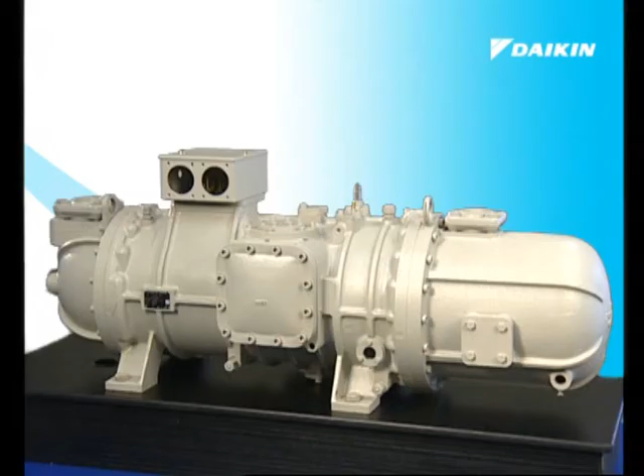A marvelous new feature has been added to the Daikin single-screw compressor: a capacity control mechanism that steplessly varies capacity between 30 and 100%. The major benefits are again simplicity and reliability. Before elaborating on this, let us first examine the main parts of the compressor.

To the far left side, the compressor inlet. Moving to the right, the electrical motor, then the compressor itself, and finally, the oil separator on the far right. Besides the nameplate on the compressor, we find that instead of the flanges, a suction valve and a discharge valve can be mounted. Plus a flare connection for the low pressure and the high pressure measurement.

On top, we see the body of the 12% capacity solenoid valve. Below this, two oil drain connections. Then the oil level sight glass. That, by the way, includes a nice feature that assists in correctly interpreting the reading.

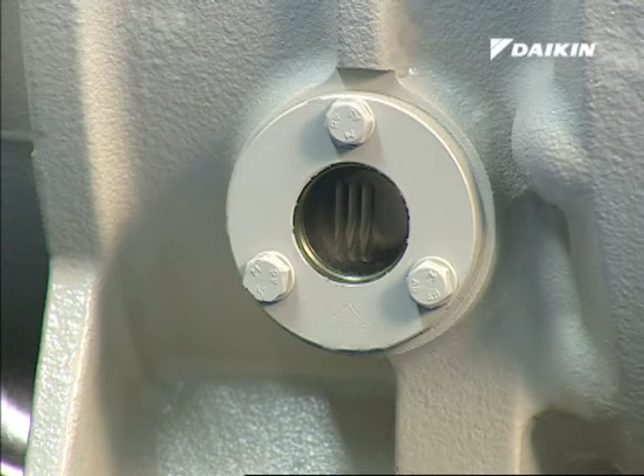This oil level indicator has clear vertical markings on the glass. These markings, however, are not visible when there is oil behind them. So when the marks are visible, as is the case now, there is no oil in the compressor, a situation that certainly requires attention. Back to the general view. The crankcase heater will be inserted into this bottom right position.

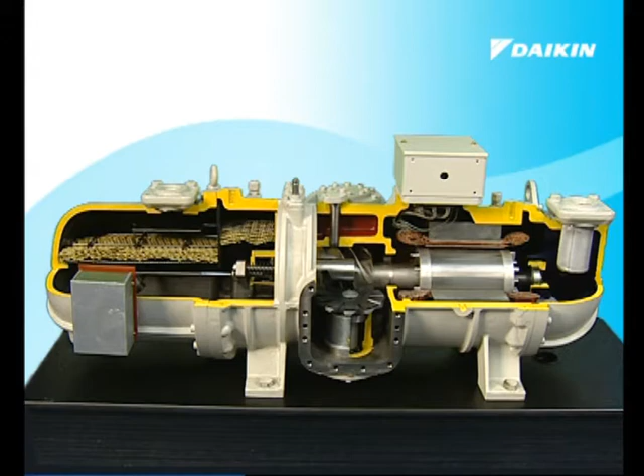Now, to explain this compressor, take a look at this cutaway version. At the bottom left of the oil separator, we see where the heater is inserted that is designed to maintain the oil temperature when the compressor has stopped. To allow us to operate this cutaway version, parts were added on the main shaft. Isn't it remarkable how few moving parts there are?

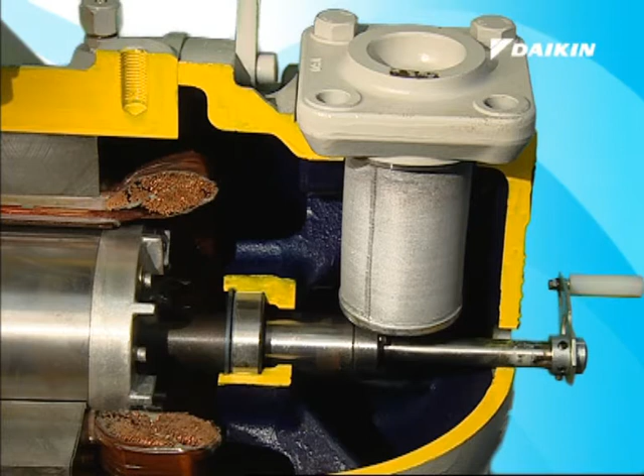Let us follow the flow of the refrigerant through the compressor. First, through an optional suction valve and inlet filter. The suction gases will then flow over the windings of the electrical motor, using the various channels for the required cooling, and thus also avoiding liquid refrigerant reaching the compressor section. Underneath the switch box, we see the connections of the windings and the CTP, the compressor thermal protector.

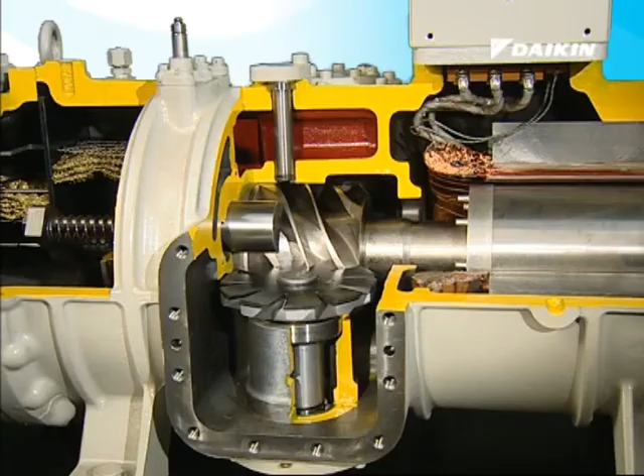We already noted that there are few moving parts. Indeed, the unique screw makes use of a direct drive, and consequently, no gearbox or other transmission is required. The screw is thus mounted on the same shaft as the rotor of the electrical motor. The capacity slide will be controlled by the stepless mechanism that we will discuss later.

Note also the red part, the discharge chamber. This discharge chamber will act as muffler or sound attenuator, and, importantly, also lightens the construction. This light construction will easily absorb the expansion due to the compression heat, thus preventing the machine from seizing up. The part inserted through the discharge chamber is the connection of a possible economizer.

Gate rotors are also essential parts of a single-screw compressor. The upper gate rotor is the one we can see here. The lower gate rotor is invisible now, but it is located at the same height on the other side of the screw but flipped over. This balances the forces on the screw, so that no radial force is exerted on the bearings. The compression will occur in the grooves using the fingers of the upper and lower gate rotors.

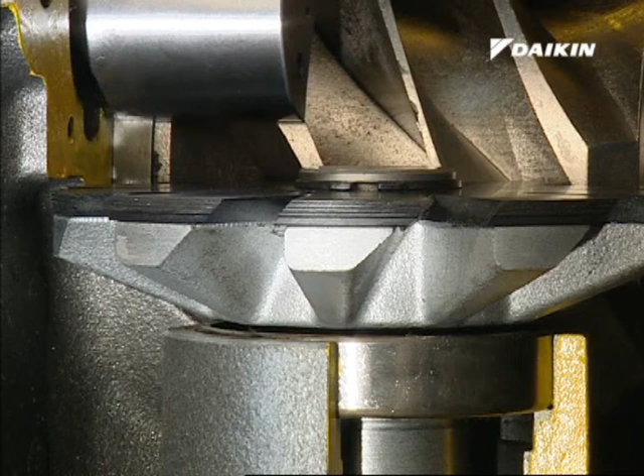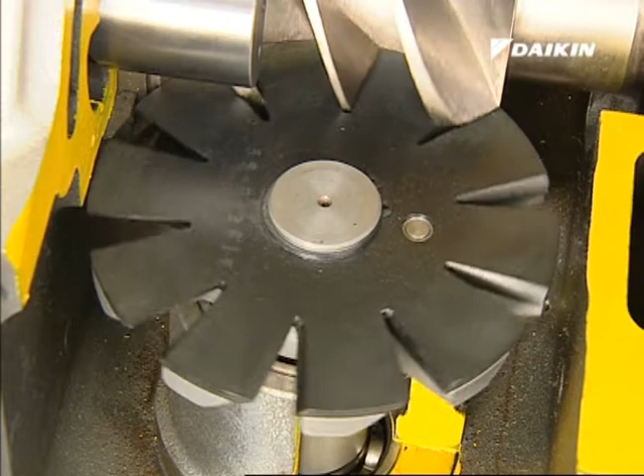This upper gate rotor is made of 8 mm engineering composite. Note the nose of the gate rotor. These horizontal ribs assure proper sealing at the bottom of the groove or compression chamber. Notice also how the composite material is loosely supported and kept into position.

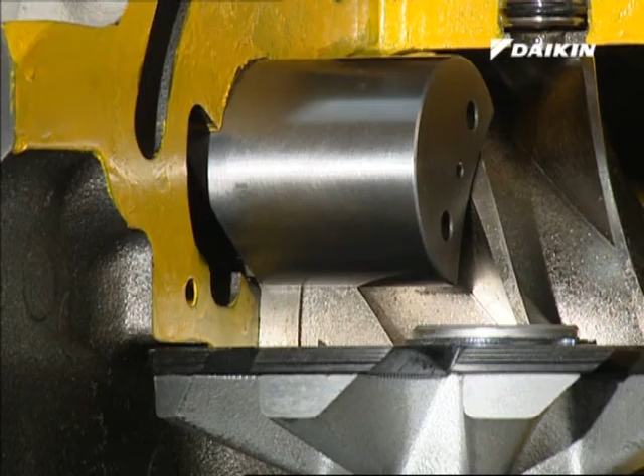Here we see how the capacity control slide moves between 0 and 100%. Contrary to what you might think, the full length of the screw is not used. 100% capacity is reached with this portion of the screw being used. Notice that the size of the discharge port also needs to increase, as the amount of refrigerant through it increases. This is easily visible when we remove the slide.

Now a brief explanation of the compression itself. The suction gases cool the motor windings and are admitted into the open end of the screw. The groove of the screw will be filled with low-pressure gas. The screw and the gate rotors move, and we see about here that one of the fingers of this upper gate rotor is closing a groove.

From here, the groove will be reduced in volume so that the trapped gas is compressed more and more. The same action occurs simultaneously in the lower side of the screw at the lower gate rotor. All of this pressure will be discharged through the opening created by the slide valves, allowing the high-pressure discharge gas to exit the compressor section.

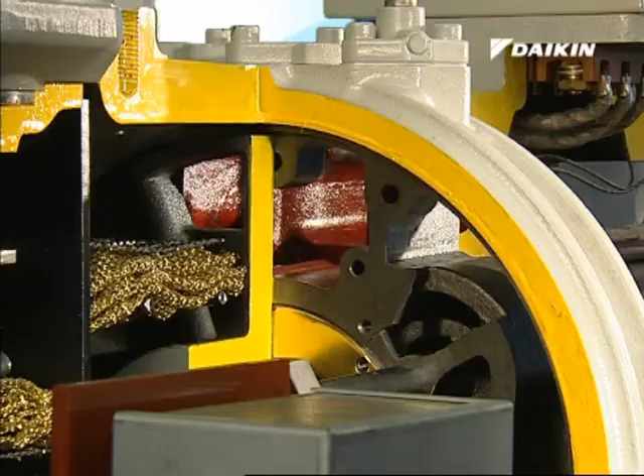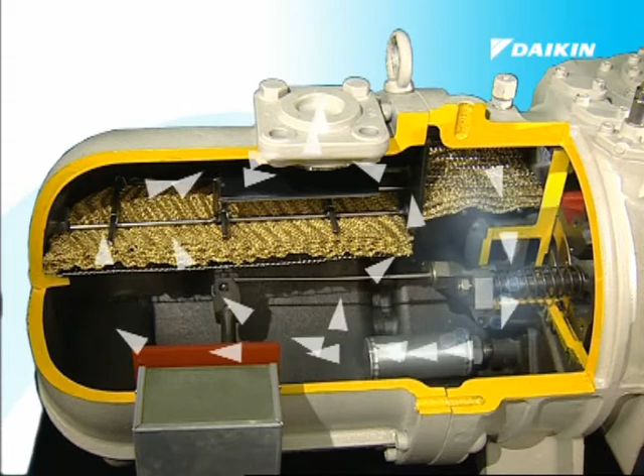After compression, the discharge gas, mixed with oil, will flow through this demister and the oil separator. Here this oil mist will be liquefied and thus kept in the sump of the compressor. Without this, the oil would be ejected together with the high-pressure discharge gas. Moreover, the high-pressure gas also pushes on the surface of the oil in the sump, eliminating the need for an oil pump since all lubrication will be done using differential oil pressure.

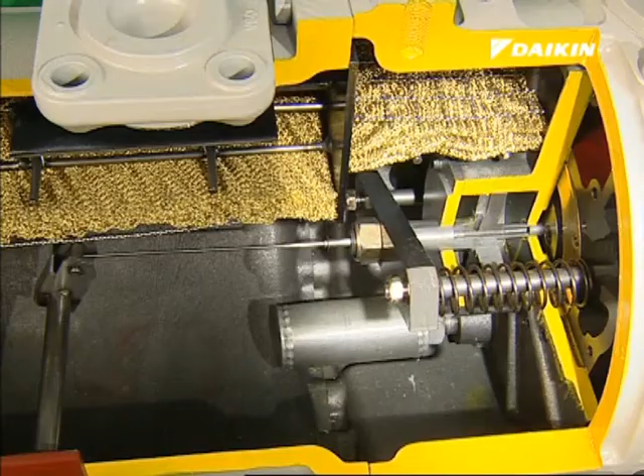Now that we understand the flow in this compression process, we can examine the details of this new stepless capacity control mechanism. The main parts are the piston and pilot valve, the bridge over the two slide valves, and the two springs that push back the assembly to the zero capacity position all the way to the left.

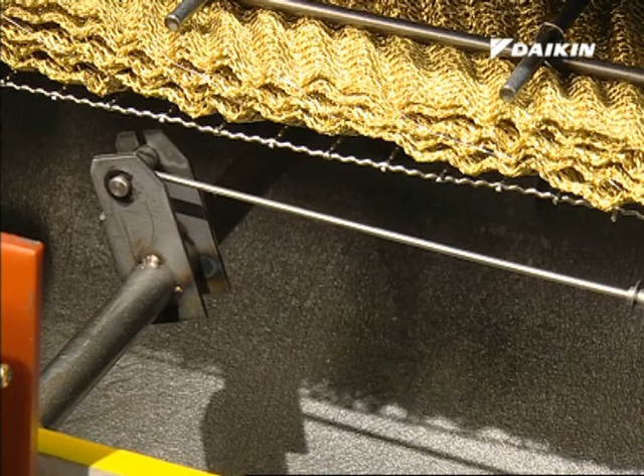Let us first consider the movement of the pilot valve. After that, we will concentrate on how the piston is moved. The pilot valve will move from 0% fully left to the 100% position. In reality, this movement occurs much slower. It can take up to 320 seconds to obtain full capacity from the compressor, that is, using an outlet water control configuration.

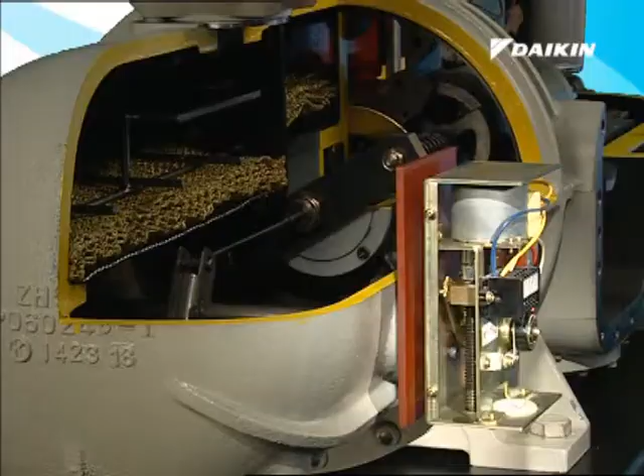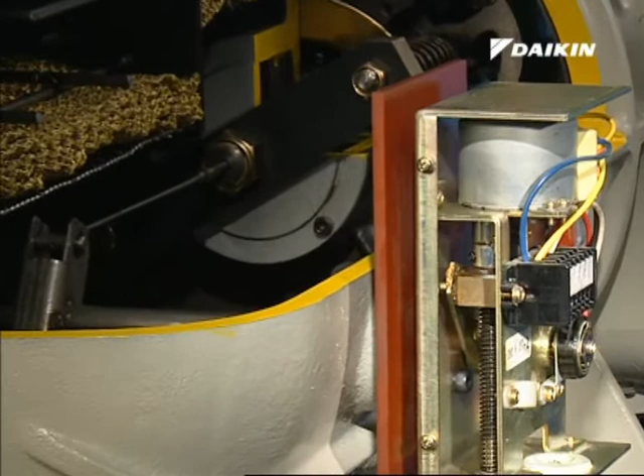The movement of the pilot valve actuator rod is controlled in a small box mounted on the outside of the compressor. Two O-rings seal the shaft. The step motor will drive a screw shaft. Connected to this screw is the sector that will twist the pilot valve actuator rod. In line with the actuator rod, a potentiometer for feedback is mounted.

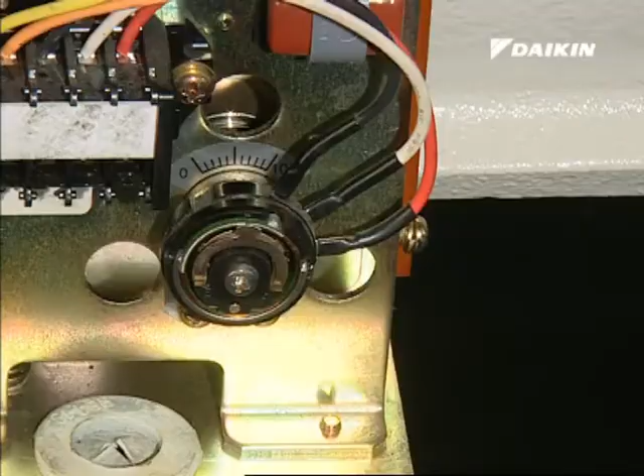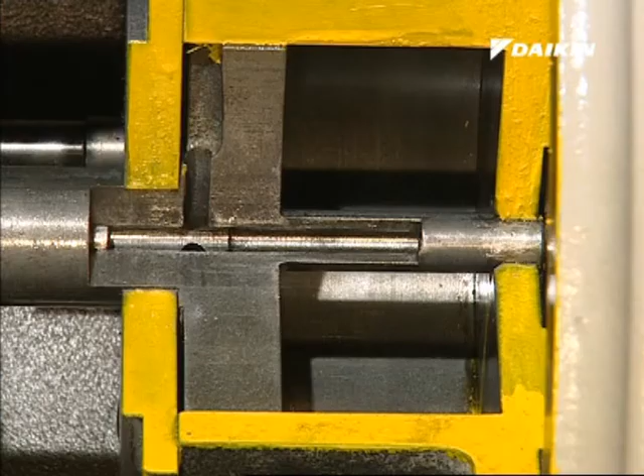Then comes the piston. Remember that this piston movement is linked to the slide valves using this bridge. This piston will be put in motion by a combination of the spring force, high pressure, and so-called dynamic pressure. To explain dynamic pressure, we will draw a parallel with a traditional piston compressor.

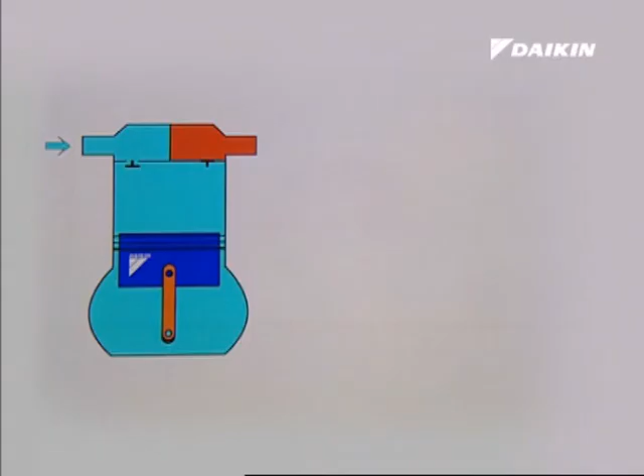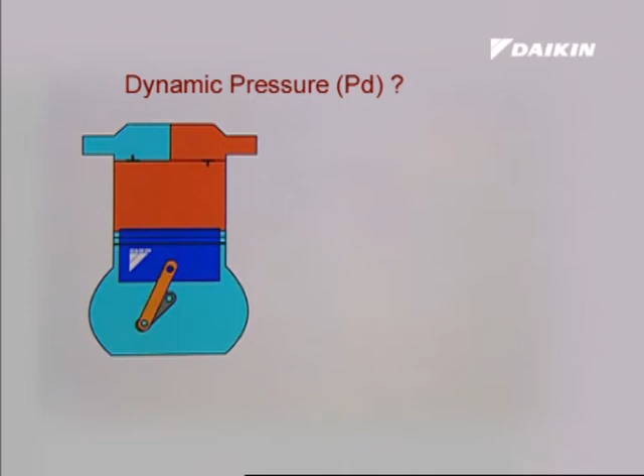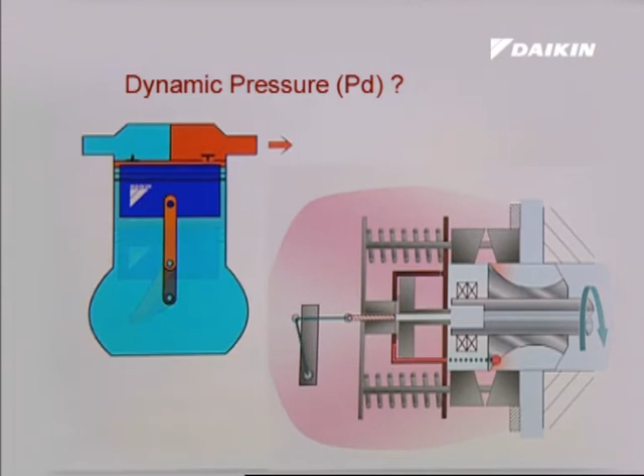The suction gas is drawn into the compressor using the inlet valve. The gas is then compressed, but before the discharge valve is opened, the pressure builds up to a slightly higher pressure, the dynamic pressure. This overcompression is about 1.5 to 2 bar higher and will be taken in the compression chamber around the screw just before the slide valve. The piston continues to rise and the high-pressure discharge exits the compressor. Let us consider how this higher pressure is brought into the capacity control cylinder.

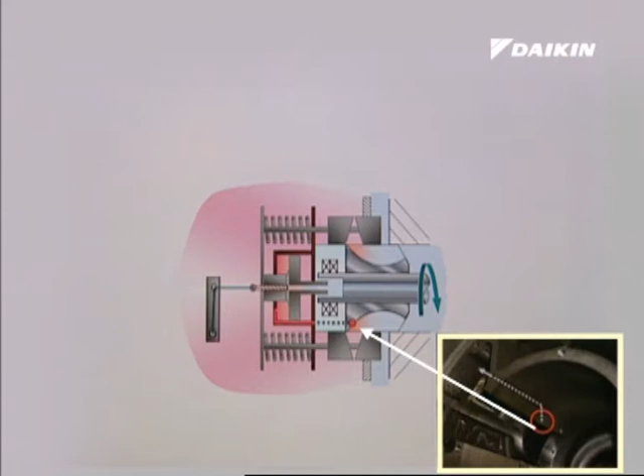This picture shows where the pressure pickup occurs in the compression chamber. We also clearly see the housing of the slide valve. Note that the dotted line shows the passage in the cast iron housing. Then there is the flange. Note the tiny hole. Through this hole, pressure and no flow will pass. It is also interesting to compare this tiny hole with the size of the bleed opening we mentioned a while ago. Finally, there is this cover, where the dynamic pressure will be allowed to exert pressure on the left side of the piston.

The compressor is started, and because of this, the piston moves to the right, pushed away due to the dynamic pressure. Actually, first, the piston will automatically move to its 12% position, regardless of the pilot valve. This travel is obtained due to the size of the inlet port for the dynamic pressure. Only after 200 seconds, the required startup time, the capacity will be allowed to build up in a sequence of sampling and upload actions, all the way up to full load operation.

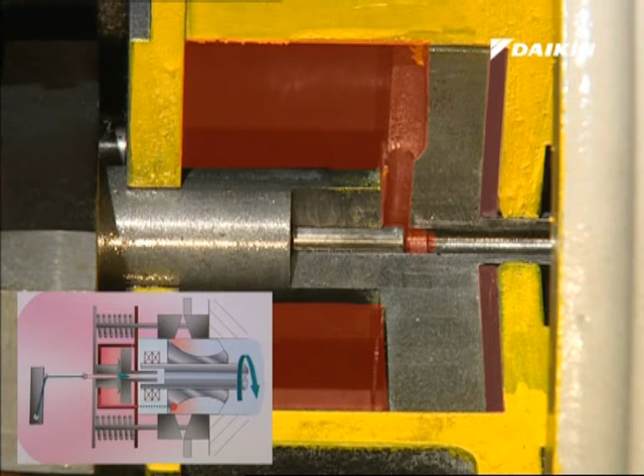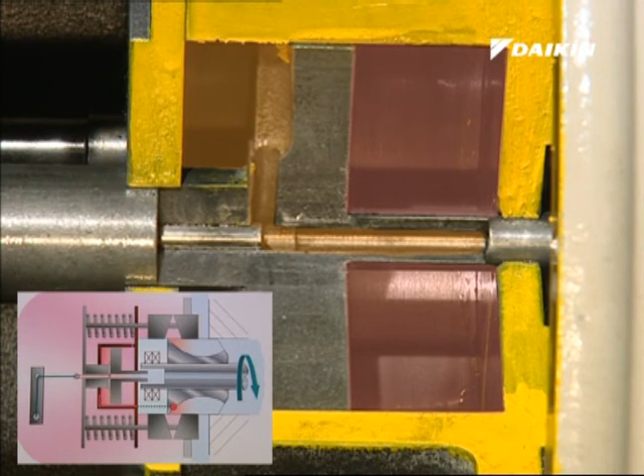Reducing the capacity is somewhat different, since here the opening in the piston shaft will be used to bleed off the dynamic pressure so that the high pressure, to the right of the piston, together with the force exerted by both springs, will become greater than the dynamic pressure and will push back the piston to its 0% position.

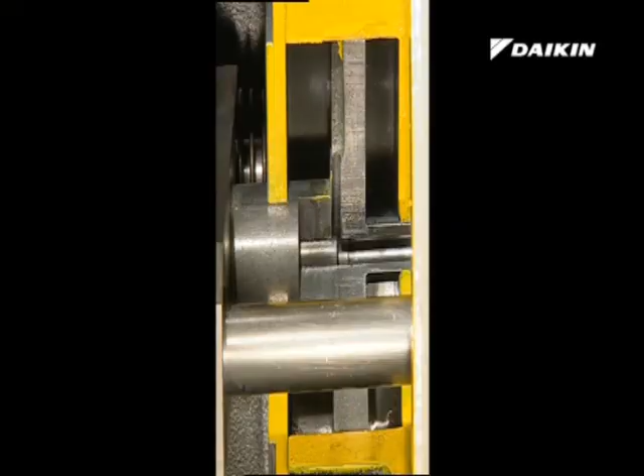Note that if an emergency stop is required, the machine will stop immediately. When the machine has a controlled stop, the 12% solenoid valve is activated, and the piston is forced rapidly to the left. This action will quickly balance the pressures so that reverse rotation is reduced and damage avoided. The pilot valve will return to the 0 position, however, it will take its time and follow the capacity decrease sequence. A restart will only be possible when the pilot valve has reached this position, providing no guard timer inhibits this.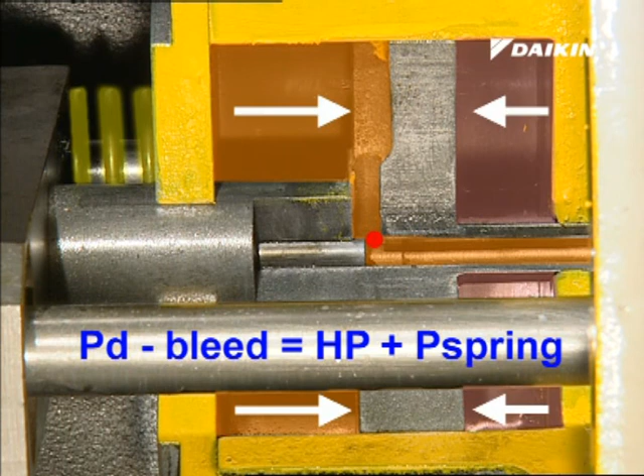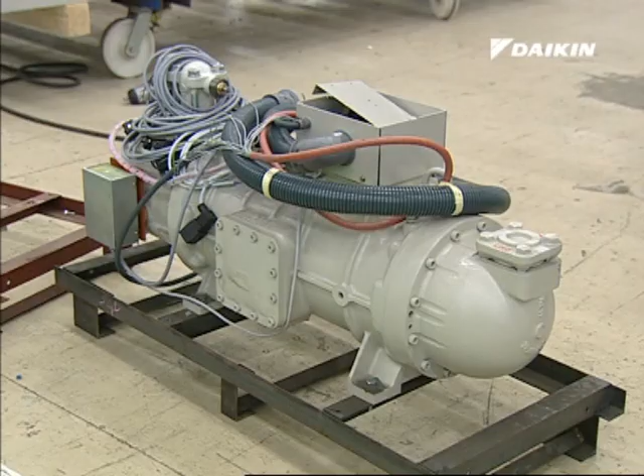There is then the stable operating state, the state the machine will operate in most of the time. The balanced forces will allow the bleed opening to remain constant, and only minute compensations will be required by the thermostat, which monitors the feedback from the potentiometer. Capacity is thus steplessly controlled between 30 and 100%. Now we understand the guaranteed optimum operation of another ZH compressor that will be installed in this EWAD 240 or in this 150 kW machine operating on R134A refrigerant.